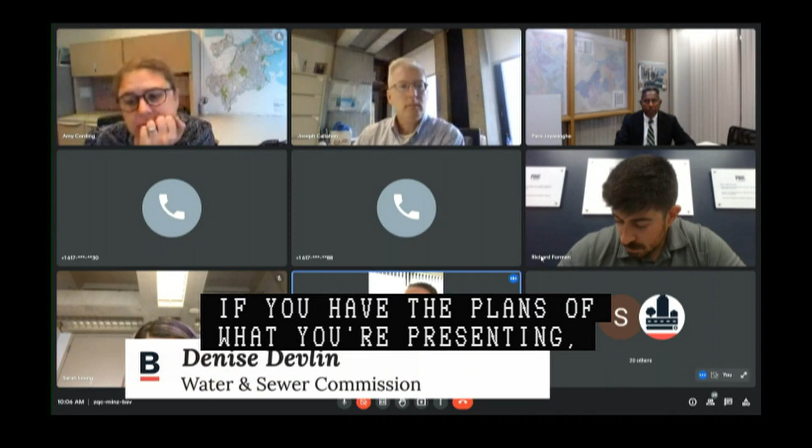Yeah, so far, these are just our comments. You appear to have included the hydrant. That was the only comment that we had. And also, I know Todd had already mentioned it about the stamp. Another comment was that it has to have a civil stamp on it. What you sent to us this morning is the same as what you sent to us before, so that's the same one you're presenting today. The location appears to be fine. We just had other comments with the hydrant, and it appears you made that change.

I don't know if it's appropriate, Para, to say it's contingent upon our approval, because the location was okay, but we still had comments that have to be addressed. And we still need to have the 4 copies to get stamped for approval on our end. Yes, regarding the stamp, I did confirm with our right-of-way manager that we do have a Mass civil engineering stamp that will be included going forward. I believe that was communicated in the email to Todd this morning with the revised plan. Oh, yes, it was.

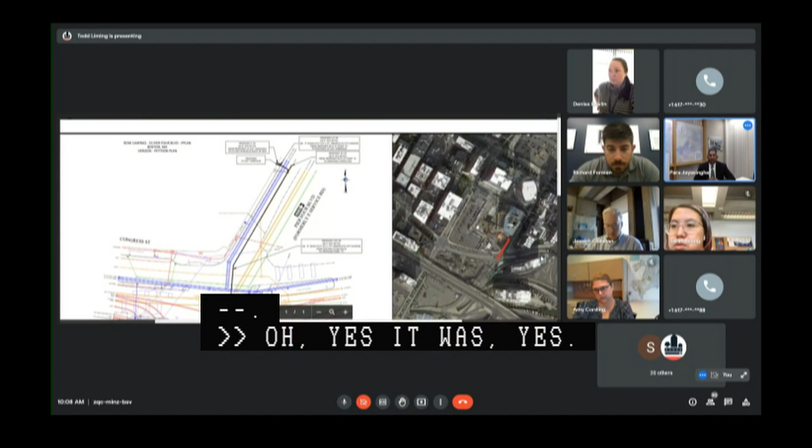Richard, I need to try and accomplish the sensible thing. So let me ask Ms. Devlin, may I suggest, hopefully it is agreeable to you, that we take a contingent vote here, so that we limit the exposure of Mr. Forman and his team from coming back again. We will take a contingent vote moderated by the board and superintendent, where the plans have to be revised to meet the totality of the needs as proposed by Devlin and staff. Is that comfortable with you, Mr. Forman? That seems to be the best thing I can do right now.

Para, I apologize. I actually can't really hear you that well. Oh, sorry. No, that's okay. I don't know if there's other noises in the background. Todd's the echo. Oh, sorry, everyone.

Okay, Todd, I think if you could mute the Boston Cable thing, it might be helpful. Denise, let me try this again.

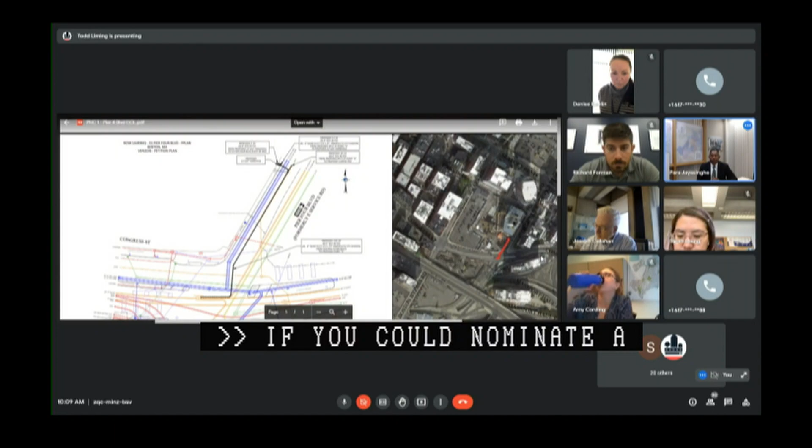So if you could nominate a motion where it is contingent upon the good people from the petitioner submitting the necessary revised plans, properly stamped, which negates the need for us to continue this hearing. Ms. Devlin, is that okay for you? Oh yes, that's fine. Thank you. Awesome. Mr. Forman, can you abide by those conditions?

Yes, so Ms. Devlin, if you don't mind me asking, are you saying that there were missed notes that were not included on the revised plan? No, there weren't. It appears that you made all the comments that we requested. But the appropriate process is to go through the Engineering Customer Services Department. So the location is okay for the conduit. It appears that you addressed our previous comments.

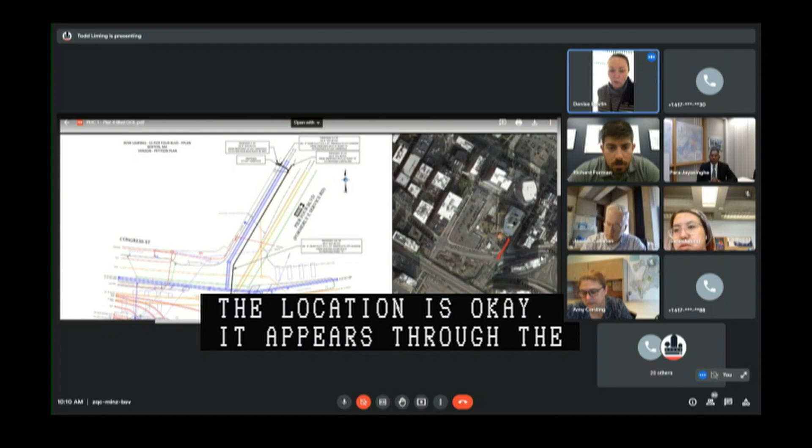Just with those other little nomenclatures, we just want to make sure that you file. Get the stamped copy through the Engineering Customer Services Department with the final set of approved plans from us. Okay, yes, so the stamped copy. Yes, so the contingency would be making sure that they are approved with the appropriate civil engineering stamp. Yes, and like our normal process, send Engineering Customer Services the 4 sets of copies to be stamped. Okay, agreed. Thank you.

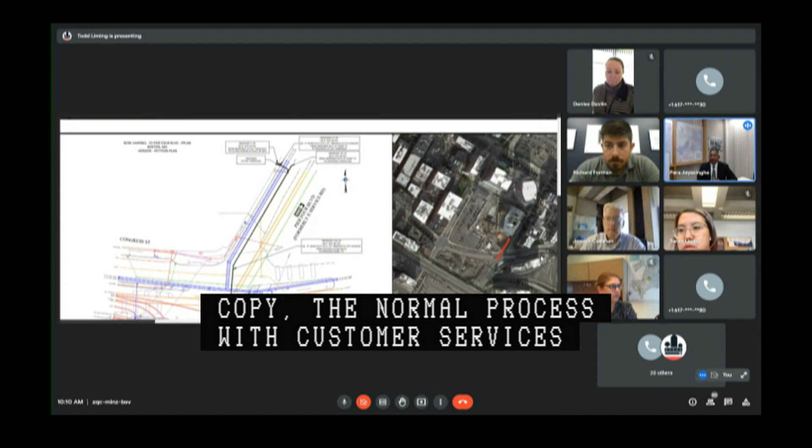Mr. Forman, sorry, Peter, just a tiny point of clarification because I was looking at some of the emails. So we need a person who is duly qualified to stamp the plans at the point of stamping. I don't want to put too much because I don't like to do group therapy in this format. Hopefully, Mr. Forman, you understand what is being requested. Yes, I understand. Awesome. So that all being said, any other commission member have any comments regarding the first public hearing continued item?

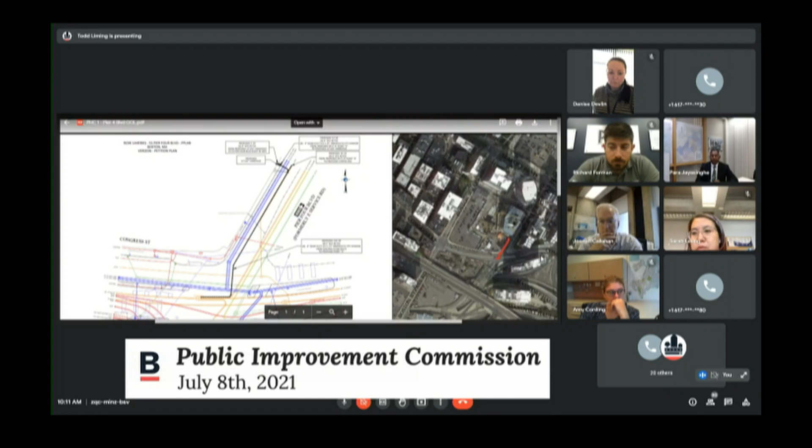Hearing none, PIC staff and all members of the audience? No, we are all set. And again, I apologize for the echo or the static from this microphone. It does need to remain open during the hearing for audiovisual purposes, but no comments on this project. Thank you, Todd. Ms. Devlin, I would like to get a motion from you at this point.

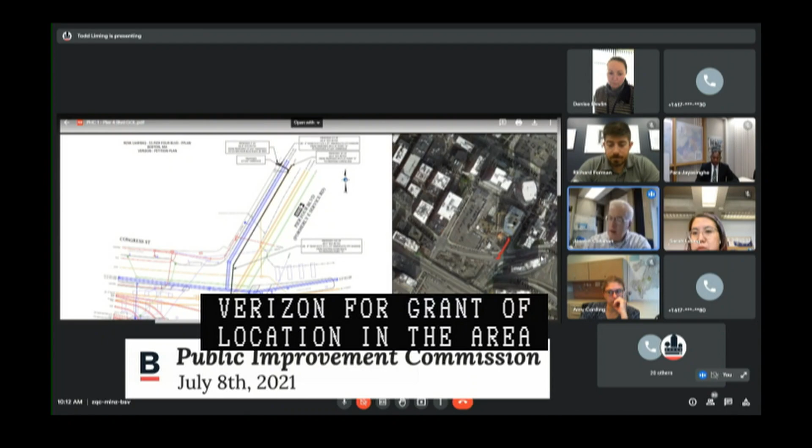I make a motion to approve a petition by Verizon New England for a grant of location in the area of Pier 4 Boulevard and Congress Street, contingent upon the applicant complying with Boston Water and Sewer requirements for plan submittal, and also contingent upon getting an authorized stamp from a civil engineer. Do I hear a second? Second. All in favor, please signify by saying aye. Aye. Aye. Anyone opposed or abstain? Hearing none, motion passes as a contingent vote. Thank you, Mr. Forman, Mr. Callahan and Ms. Devlin. Moving on to the public hearing segment of our agenda.

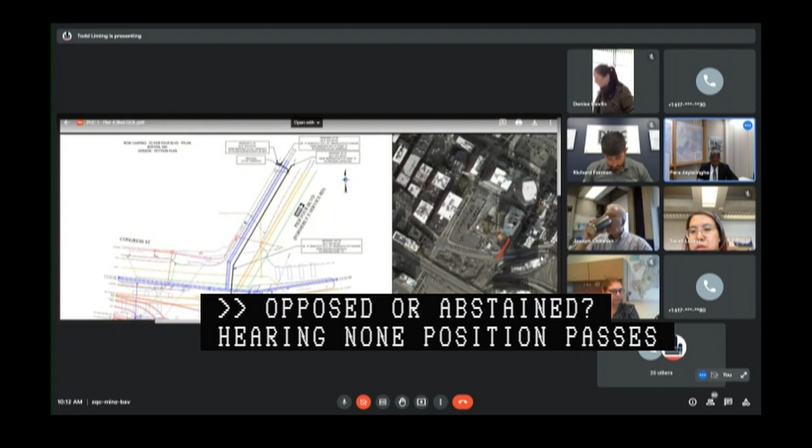Item number 1, on a petition by 250 Centre Street Housing Limited Liability Company for the discontinuance of any and all rights to travel the public may have had within a portion of Amory Street, a public way in Roxbury on its westerly side, south of Centre Street. This was brought under new business on June 24th of this year, as shown on a plan entitled City of Boston Public Works Department, Engineering Division Discontinuance, Amory Street, Roxbury, one sheet dated June 14, 2021.

Good morning, Commissioners. This is David Aiken, Senior Project Manager at the Community Builders. I'm joined here today by John Schmid from Nitsch Engineering. This is a discontinuance request so that we can construct 250 Centre Street, which is 110 units of mixed income housing, about 2/3 of which are affordable and income restricted housing. We are getting ready to commence construction later this month.

And in the time since the new business hearing, we have taken fee ownership of the underlying property, which was one of the items that we had to do to meet the public hearing requirement here today. And we've also submitted the appraisal to the Public Improvement Commission staff, which I know is under review. So we're hoping for a vote on this today so that we can continue to move forward and start construction on this development later this month. John Schmid has the plans that he can share if needed.

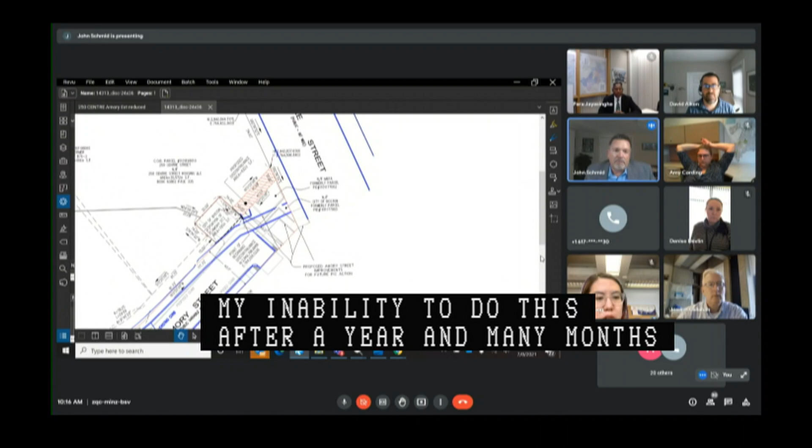So first of all, I apologize for my inability to do this after a year and many months of Google Meets. So we're proposing to discontinue 432 square feet of the layout of Amory Street Extension. And this will allow the construction of 250 Centre Street to commence, which is an affordable housing project in the Jackson Square neighborhood. This discontinuance will still allow the city a 40-foot right-of-way that will bring Amory Street Extension to Centre Street, should there be desire to make a connection by roadway to Centre Street in the future.

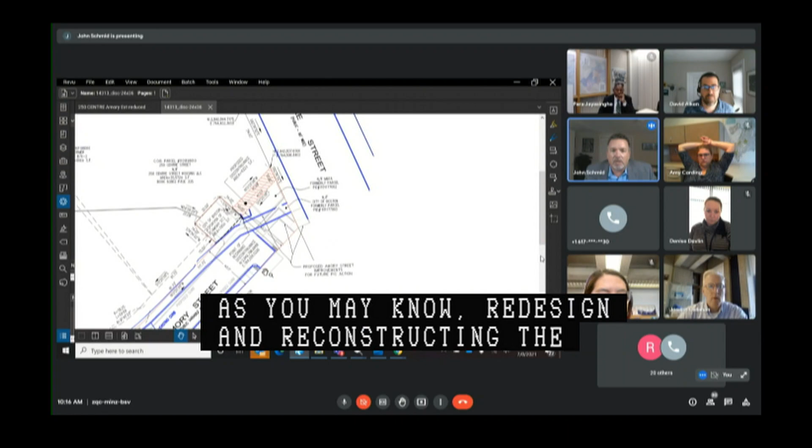As you may know, we are in the process of working with Boston Public Works in redesigning and reconstructing Amory Street Extension, which will allow a pedestrian pathway from the end of the extension through the remaining 40 feet of public right-of-way space to Centre Street. And actually, this morning we received an email from Zach with the first 25% review comments. And we will be coming to the commission probably sometime this fall for the Amory Street Extension approvals. But for today, we're asking for the discontinuance of 432 square feet that is approximately 10 feet wide and 45 feet long.

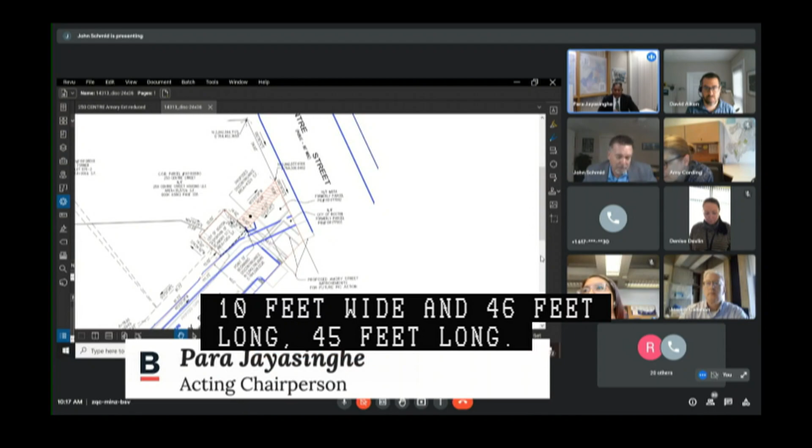John, just to echo some of the thoughts you have shared so far, I want to hear again that the discontinuance does not impede in any way, either through design or through construction, the city's ability to do the extension work. Right. So this design does not impede any existing utilities or proposed utilities or the city's ability to proceed with the extension work.

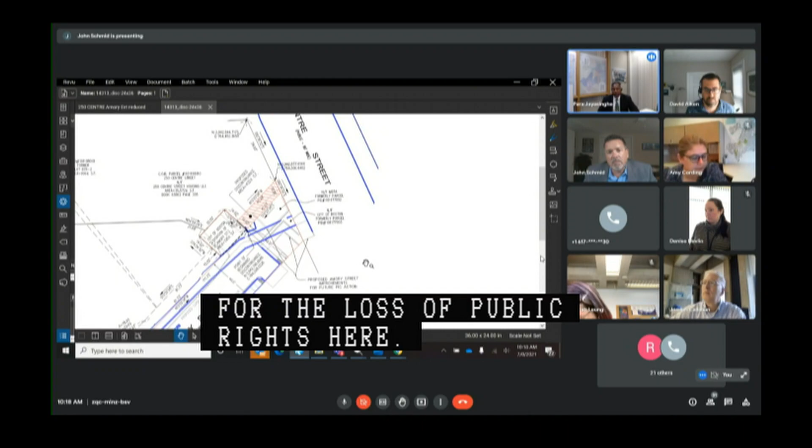Wonderful. Second question, and this is for Mr. Liming of PIC staff. Todd, who is the fee owner in the discontinuance? Is there monies involved with it? Yes, the petitioner is the sole owner of the fee interest in this land. They have submitted an appraisal to us. We are reviewing it, and provided that there are no issues with the appraisal, the petitioner will pay the city for the loss of public rights here. So I want to make sure that this doesn't get recorded until we finalize those conversations, Todd. I believe that is the normal way which we do business. Correct. We will not record any discontinuance documents until the city approves the appraisal that was submitted. Wonderful. Thank you, Mr. Liming, for that clarification.

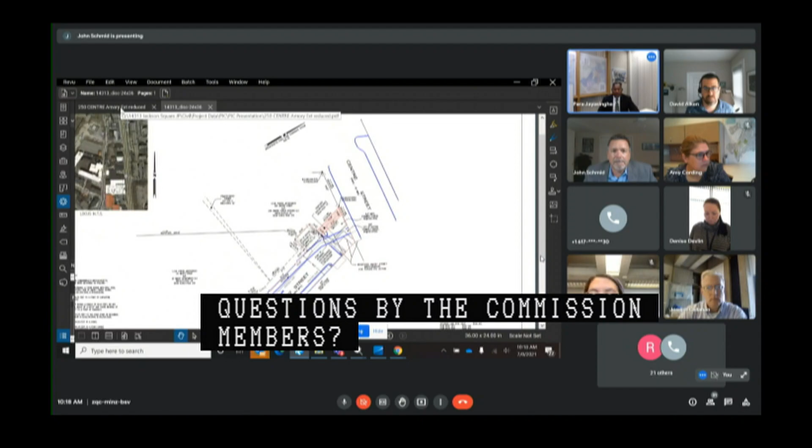At this point, are there any questions by fellow commission members? Hearing none. Are there any comments by PIC staff and or members of today's audience? No, none. At this point, I'd like to hear a motion regarding public hearing number 1. I'll make a motion to approve a petition by 250 Centre Street Housing LLC for the discontinuance in Amory Street as read into the record by the chair. Second. All in favor? Aye. Anyone opposed or abstaining? Hearing none, motion passes. Thank you, folks. Thank you very much.

Moving on to the second item on the public hearing segment, on a joint petition by Corey Realty Ventures Nominee Trust and Jordan Realty Advisors LLC for the acceptance of a pedestrian easement adjacent to the following public ways in Brighton. Corey Road on its southeasterly side at address number 249 southwest of Jordan Road. Jordan Road on its southwesterly side between Corey Road and the town of Brookline municipal boundary. This was brought under new business on June 24th of 2021, as shown on a plan entitled City of Boston Public Works Department Engineering Division Pedestrian Easement Plan 249 Corey Road, Jordan Road, Boston, Brighton, one sheet dated June 17th, 2021.

Good evening, everyone. My name is Bert Corey. I'm with DGT Associates, civil engineers and surveyors for this property. As you mentioned, I'm representing Jordan Realty Advisors, LLC, and Corey Realty Ventures Nominee Trust. Even though my last name is Corey, I have no relation to Corey Road nor to Corey Realty Ventures Trust. I just happen to have the right name, I think, for this project. So this particular one is actually, let me present my screen. Thank you, Bert. You're good. You're welcome.

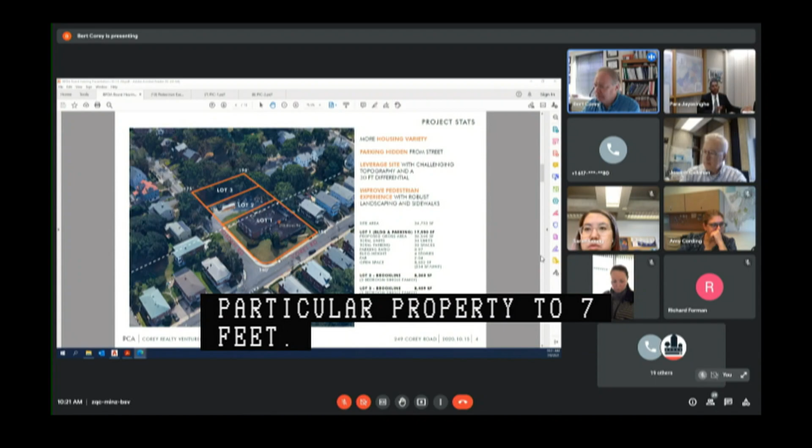249 Corey Road is at the corner of Jordan Road and Corey Road in the Brighton district. It is owned by the applicant, and for this particular public hearing, this is with regards to the pedestrian easement plan. So as part of the process and the information that we received back from the city agencies, there was a request to widen the sidewalk along this particular property to 7 feet. And in order to do that, the pedestrian easement was drawn up to allow approximately a half a foot onto the subject property, so that the sidewalk from the curb to the retaining wall that will surround this front part of the property would provide that 7 feet. The pedestrian easement plan is shown. It's also dated 6/17. It was presented during the new business.

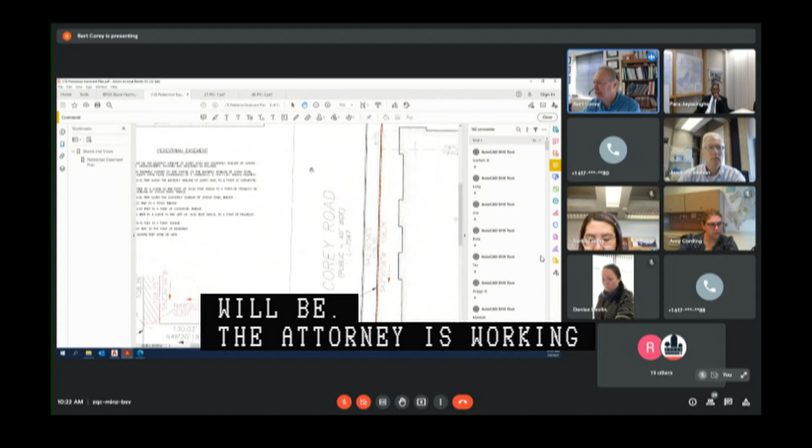I think as far as, like I said, it's a half a foot in from the property line, and we show the detail of what that pedestrian easement will be. The attorney is working on the verbiage for that, or the written easement, as well as the grant of easement for that. Thank you, Bert.

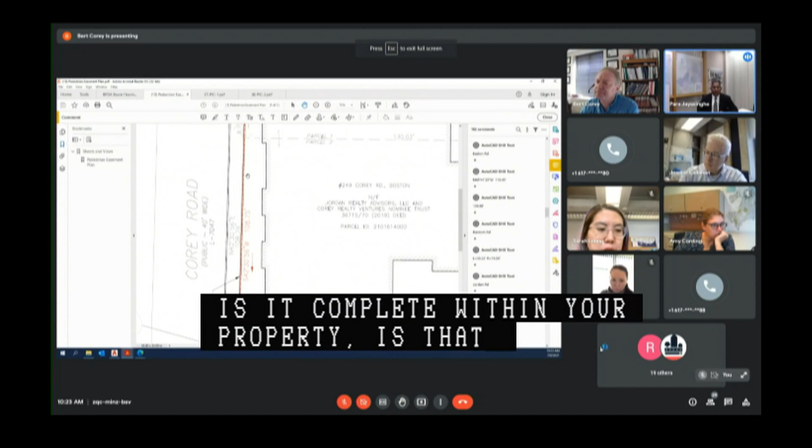Just a point of clarification triggered by a comment you made. You said that there's a retaining wall associated with this project. I'm going to assume two things. One, it is completely within your private property. Is that correct, Mr. Corey? That's correct. Second, Mr. Bert, I'm going to assume also that the said retaining wall shows up either in the specific repair plans or the pedestrian easement plans, because I can't quite see. Can you verify whether the retaining wall shows up in one of the two plans?

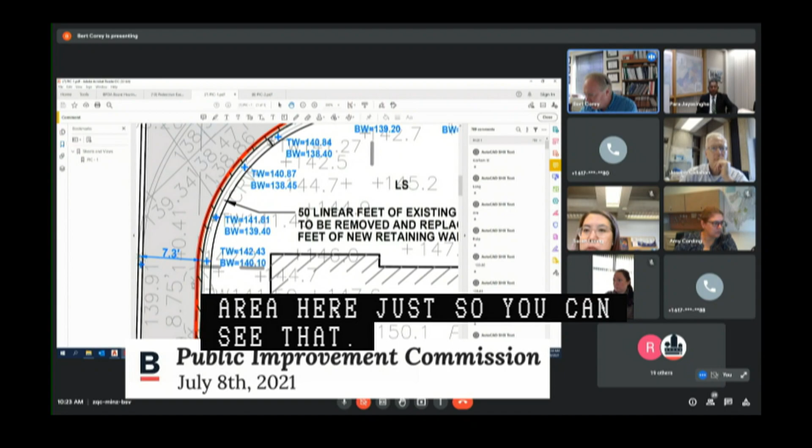Yeah, if we go into the plan that was prepared, it's part of the specific repair. Yeah, it's the specific repairs. All right, let me zoom in on an area here, just so you can see that. Okay, if you can see this, this area here is the retaining wall. So the front face of the retaining wall will be right on the edge of the easement. Thank you, Bert. Appreciate you clarifying.

If you could put back the pedestrian easement plans, because that is the subject of the present hearing. Yes. Even though I took you on a left turn, I just want to make sure that there's continuity in the conversation. So, appreciate you taking the extra efforts to provide this easement. At this point, I'll open up for any questions or comments by fellow commission members.

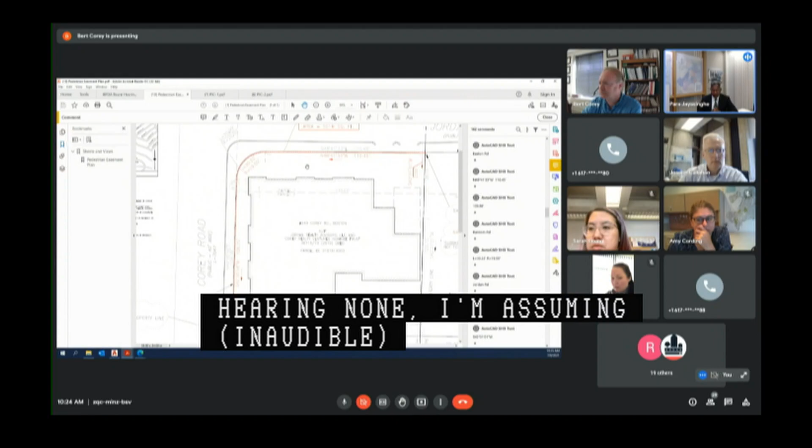Hearing none, I'm assuming that we are all very appreciative of you taking the extra step to provide that half a foot to ensure that our sidewalks are as usable as possible on a 40-foot layout. Are there any comments or questions by PIC staff and or members of today's audience? No, none. At this point, I'd like to hear a motion regarding public hearing number 2.

I'll make a motion to approve a joint petition by Corey Realty Ventures Nominee Trust and Jordan Realty Advisors LLC for pedestrian easement in Corey Road and Jordan Road as read to the record by the chair. Second. All in favor, please signify by saying aye. Aye. Aye. Anyone opposed or abstain? Hearing none, motion passes.

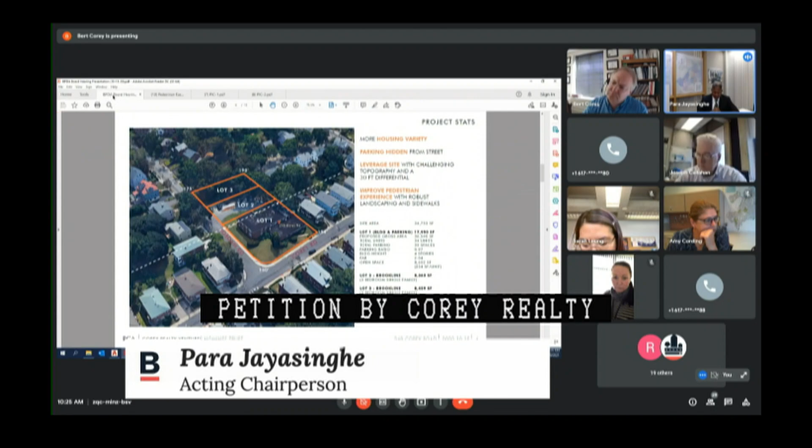Third item on today's agenda, on a joint petition by Corey Realty Ventures Nominee Trust and Jordan Realty Advisors LLC for the making of specific repairs within the following public ways in Brighton, consisting of curb realignment, sidewalk reconstruction, as well as new and relocated pedestrian ramps, storm drain infrastructure, and driveway curb cuts. Corey Road on its southeasterly side at address number 249, southwest of Jordan Road. Jordan Road on its southwesterly side between Corey Road and the town of Brookline municipal boundary.

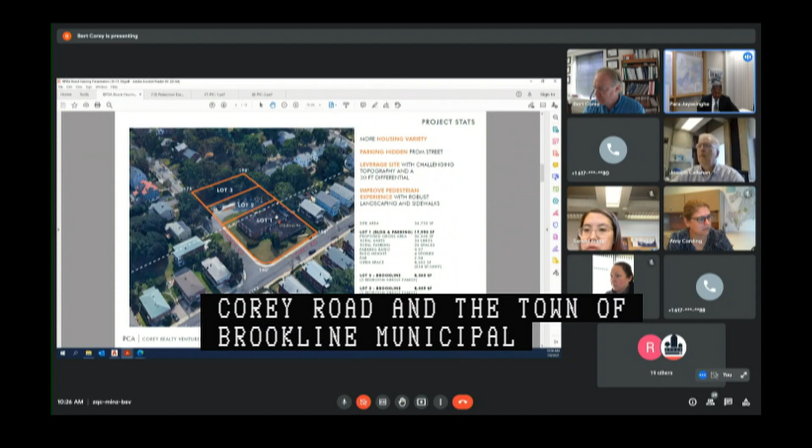This was brought out as new business on June 24th of this year, as shown on a set of plans entitled City of Boston Public Works Department, Engineering Division Specific Repair Plan 249 Corey Road, Jordan Road, Brighton, dated June 17, 2021.

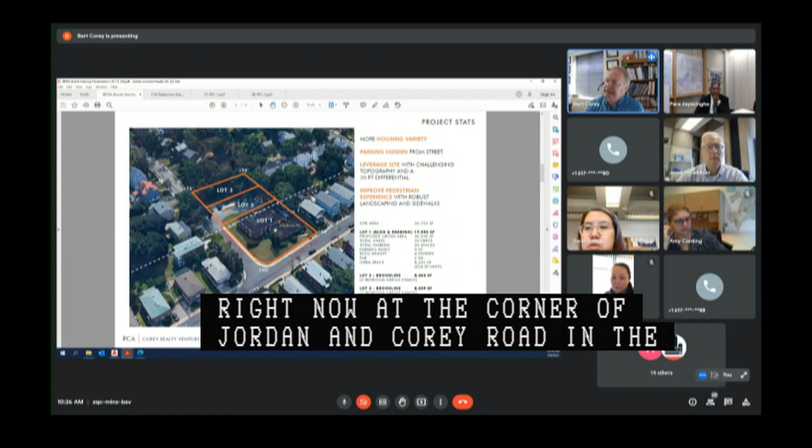Again, Bert Corey, DGT Associates, we're the surveyors and civil engineers for this project, representing Jordan Realty Advisors LLC and Corey Realty Ventures Nominee Trust. 249 Corey Road is shown on the screen right now. It's at the corner of Jordan Road and Corey Road in the Brighton district. The project involves demolition of the existing 2-story building. It's vacant. It used to be the Corey Hill Nursing Home. Let me go back one here. This gives you a view of the existing site, Jordan Road, and then also Corey Road.

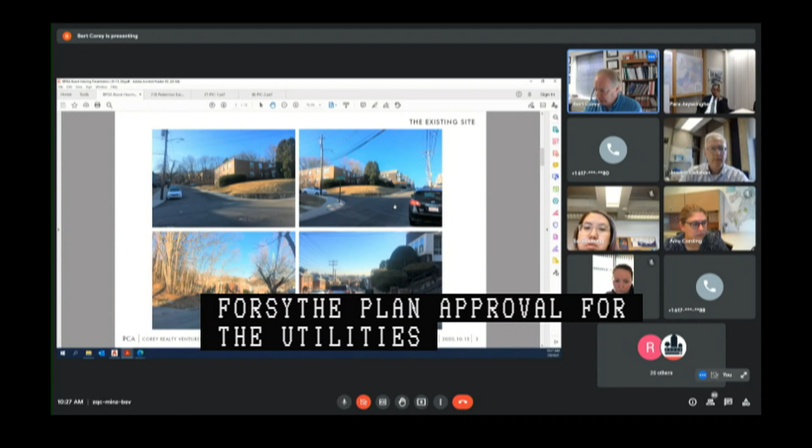As part of this process, we sent out the notifications to the city agencies as well as the utility companies. We did receive back some comments from the Public Improvement Commission, the Boston Planning and Development Agency, and the Disabilities Commission, as well as from Boston Water and Sewer. Combining all of those comments together, we're able to address all of them on the plans that you have in front of you. And just to go through those, it involves about 250 linear feet of sidewalk area that is to be replaced, starting from Jordan Road, heading down Jordan Road, around the corner, and then up Corey Road.

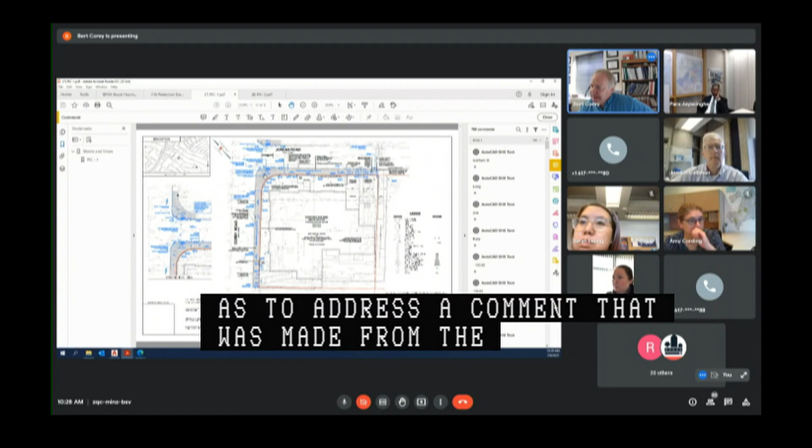As to address a comment that was made from the BPDA about tightening up the existing curb radius here from 26 to 10 feet, we were able to gain a little extra area, so that was very helpful to address a comment made by the Disabilities Commission in trying to move the pedestrian ramp from an apex configuration to one that is a little bit further up gradient of Jordan Road. And again, this change in curb radius here allows for that to occur.

At the same time, Boston Water and Sewer had a comment with regards to the existing catch basin that was at this corner. Right now, it somewhat interferes with the pedestrian ramp in that it's in a transition curve, and because of that, it really can't be a gutter mouth. Well, as part of all of these comments, we're able to move that catch basin up Jordan Road just slightly so that we could install a gutter mouth catch basin.

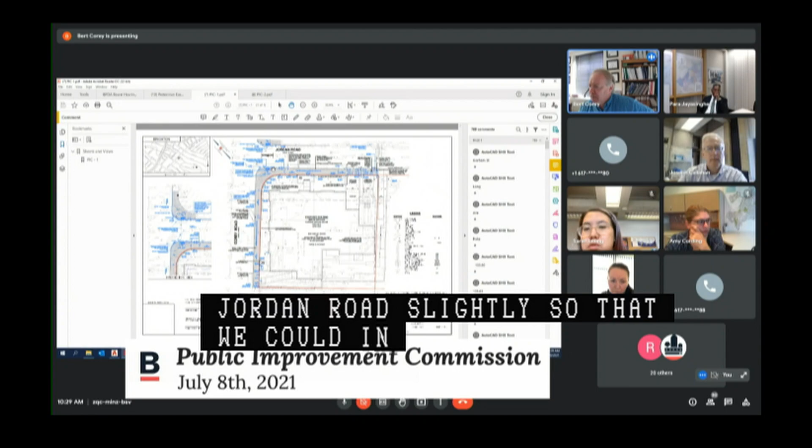So between all of those, everything worked out terrific. The extra width on the sidewalks helped out. So I think we had all good comments, and they are all addressed in this particular plan. I think I covered most of it. There are two entrances to this facility. One is a main entrance, which goes down into a lower level parking garage. That is 12 feet wide, and there's also another 12-foot wide curb cut that provides at-grade parking for FedEx, UPS, deliveries, trash removal, that type of stuff.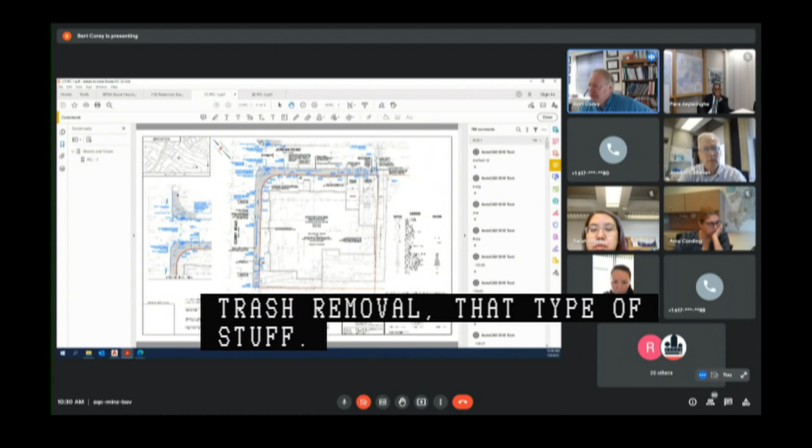Also, on the reciprocal ramp for this particular one, we're rebuilding that to a point where we can get the access ramp as well as the level landing pad to meet the specifications. However, because of the grades on this road, approximately 10% on Jordan Road coming downhill and Corey Road running downhill, with the 10 and the 10 running away from each other, the transition ramps become a little steeper than what we would typically provide to meet the handicap accessibility regulations. So we will have to go for a variance for the transition ramps, but we can provide a level landing area. So it's definitely an improvement to that reciprocal ramp. Any questions?

Oh, good morning, Bert. How are you?

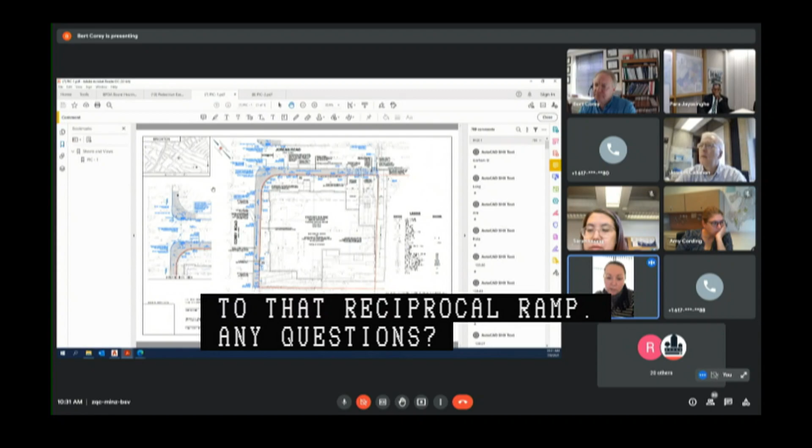Hi. Thank you for making that change that we requested for moving the catch basin so you can fit the gutter mouth. We did have an additional comment. On the specific repairs plan, that catch basin on Jordan Road, you show it tied into a manhole on Corey Road, and that is actually a change in grade. It's not a manhole. So the request we're making is that for that tie-in for that catch basin, we want it to go perpendicular to the drain on Jordan Road. And I can send you the comments after the meeting today, scan them in and email them to you.

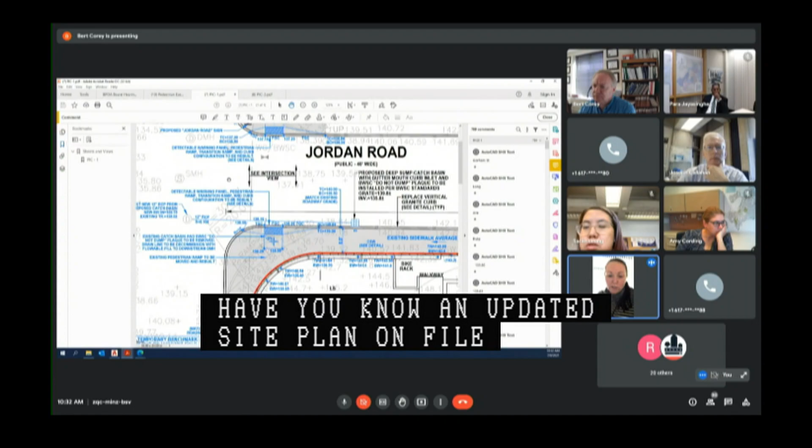Okay. And then, because it did change, we do want to have an updated site plan on file. So if you could just please contact Lewis from our Engineering Customer Services Department to make those changes. Sure. Thank you.

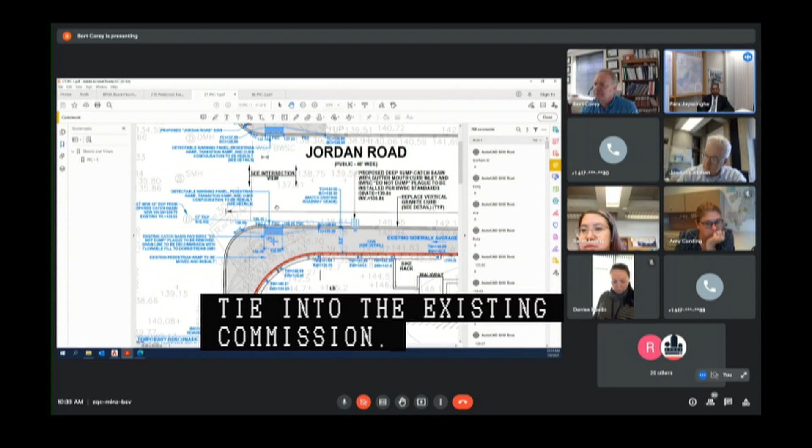Any further comments by fellow commission members? Sarah, I'm going to assume you're all okay with the condition of the ramps and the variances that Bert spoke of. Yes, and we appreciate the project team's openness to our feedback, and we're working with the project team as well for that variance that's needed to tie into the existing conditions. Thank you. Any further thoughts or comments by fellow commission members? Hearing none. Comments by PIC staff and or members of today's audience? None.

Excellent. At this point, I'd like to hear a motion regarding public hearing number 3. I'll make a motion to approve a joint petition by Corey Realty Ventures Nominee Trust and Jordan Realty Advisors LLC for the making of specific repairs in Corey Road and Jordan Road as read into the record by the chair. Second. All in favor, please signify by saying aye. Aye. Aye. Anyone opposed or abstained? Hearing none, motion passes.

Thank you, Bert. Nicely done. Thank you very much. Have a great day. You too.

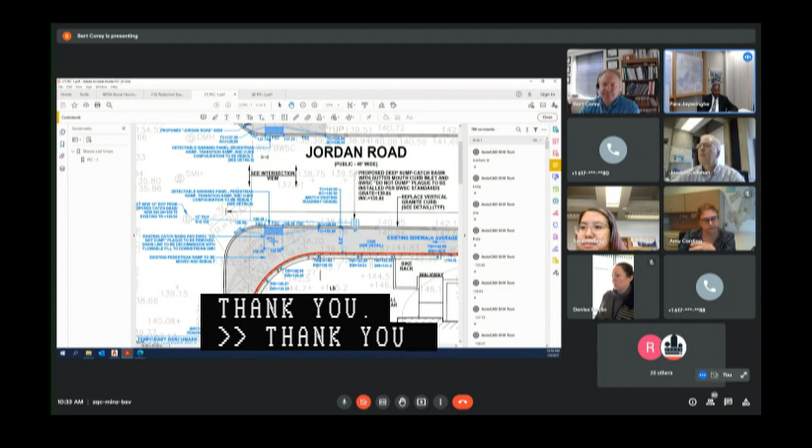Next item, public hearing number 4 on a petition by Bartlett Place Land Inc. for the making of specific repairs within the intersection of Washington Street, Bartlett Station Drive, and St.

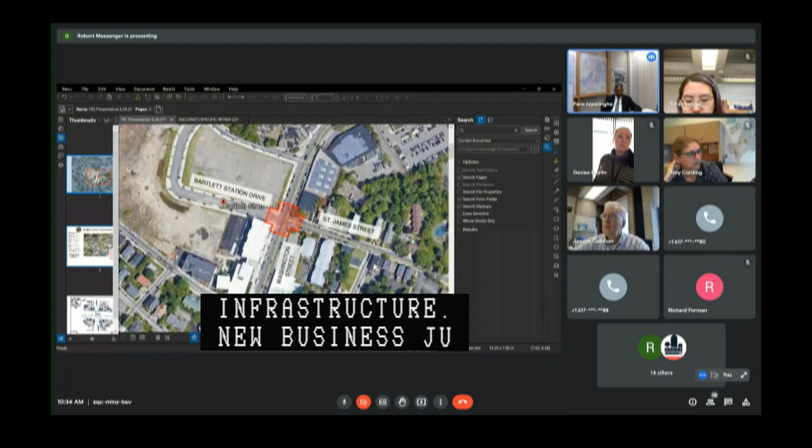James Street in Roxbury, consisting of curb realignment, sidewalk reconstruction, as well as new and relocated pedestrian ramps, traffic signal infrastructure, and street lighting infrastructure. This was brought under new business on June 24, 2021, as shown on a plan entitled City of Boston Public Works Department Engineering Division, Specific Repair Plan, Washington Street, Bartlett Station Drive, and St. James Street, Roxbury, one sheet, dated March 2nd, 2021.

Good morning. Good morning, members of the commission. Ian McKinnon here from Howard Stein Hudson, here on behalf of Bartlett Place Land Incorporated and Nuestra Comunidad, the team leading the Bartlett Station redevelopment. This morning, I'm joined by Andre Jones from Nuestra and Bob Messenger, also from Howard Stein Hudson.

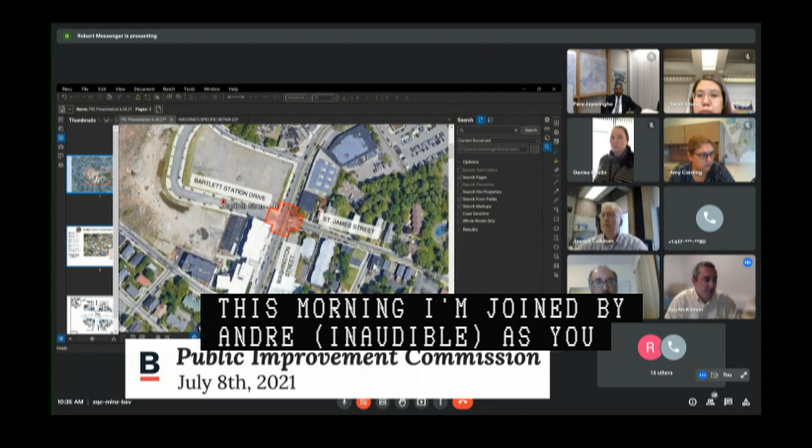As you may recall, 2 weeks ago during new business, we introduced this petition connected to the Bartlett Station mixed-use redevelopment on the former Bartlett Yard MBTA maintenance facility site just south of Nubian Square. Based on feedback from 2 weeks ago, we've made some minor plan updates, and my colleague Bob Messenger here from our team is here to walk you through the plan.

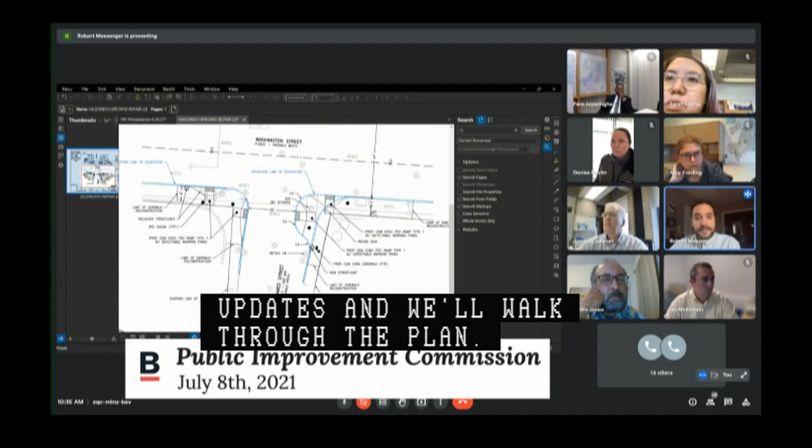Thank you, Ian. Just to orientate everybody, we've got Washington Street in the middle of the plan, Bartlett Station Drive to the top, and St. James Street on the bottom. For both intersections, the specific repairs are curb realignment, new sidewalk, and new pedestrian ramps. Zooming in on St. James Street first, that's where the majority of the new sidewalk will be. We're providing a new bump out here, city standard 10-foot curb radii. This shortens the crossing to about 26 feet for a bit safer route for the pedestrians. Just to note, St. James Street is a one-way.

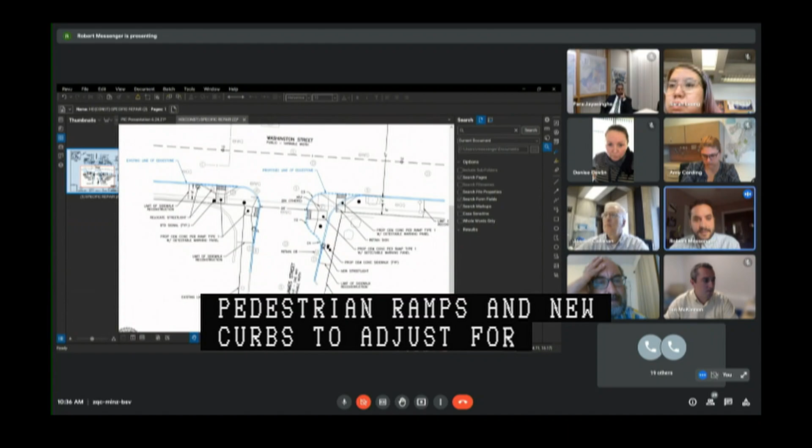On the other side of the intersection, the new pedestrian ramps and new curbs to adjust for that, and everything else is staying in place. In addition to this, the project is providing new BTD signals for the intersection. We do have enough separation for accessibility, and street lighting has commented as well, and we're relocating a street light, and we're also providing a new street light here. And in the area of the new sidewalk, there is an existing electrical duct bank that's owned by Eversource, and in the construction documents, we are providing an adjustment to grade for that manhole. However, they had no response to our reach out and our coordination.

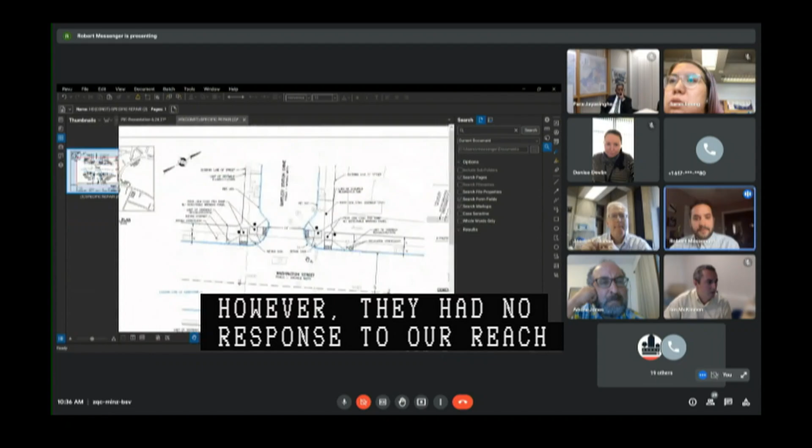Moving on to Bartlett Station Drive, very similar curb realignment. The existing opening here is 24 feet. It's maintaining the existing opening. We're straightening out or providing the 10-foot city standard radius here. Everything else is the same. New pedestrian ramps, new sidewalk. We're removing the existing apex ramps and we're straightening that out to shorten the crossing for pedestrians. And of course, new BTD signals outside of the landings, and relocated streetlight and retaining streetlight as well. And that is all.

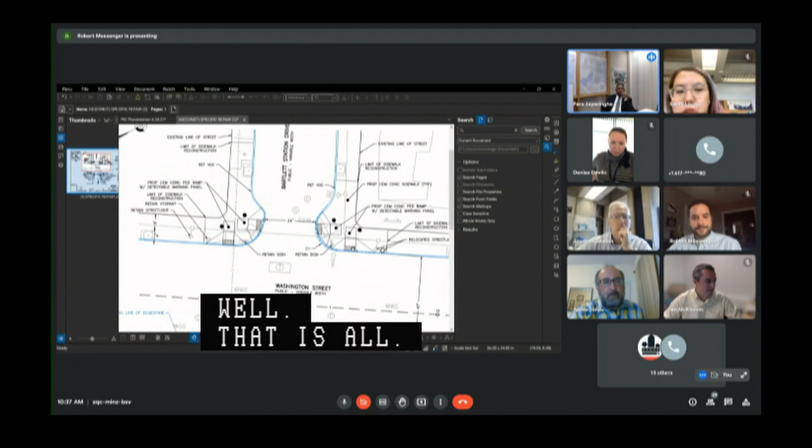Thank you, Robert. Any questions by fellow commission members regarding this presentation? Amy, I'm going to assume you're okay with the timetable and the installation of this new traffic signal, including the approval processes and all of that good stuff? Yeah, I think that Ian's gone through Don and those guys. Okay. Ian, do you have a sense of when the traffic signal might get installed? Is it a mast mount or a pole mount?

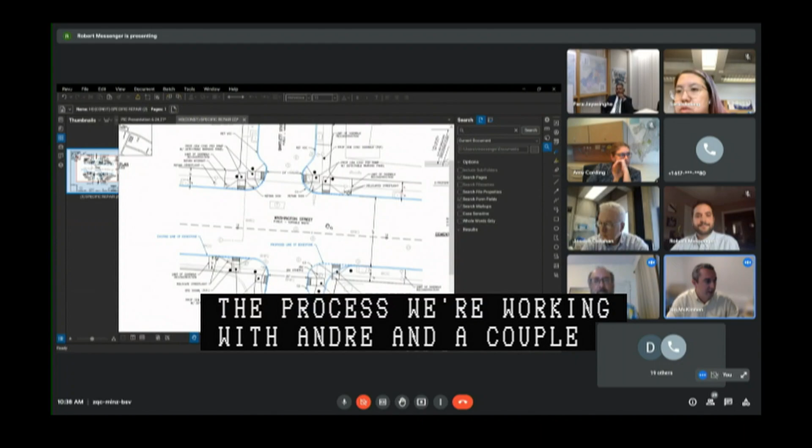Yes, we're moving into procurement this fall as part of the MassWorks grant process that we're working with Andre and a couple other parts of this infrastructure as part of this development. So later this fall is when we're going to kick that off. So we wouldn't expect this before next spring to be installed. And it has been coordinated through Don. It will be interconnected and everything is up to snuff with him.

Okay, so what we need here is a set of plans that shows the traffic signal infrastructure and the new lane markings, because you are squeezing the intersection, and it will be good for us to know where the new lane markings are, including any center line, gutter line, and all of that good stuff. You sort of understand what I'm saying, right, Ian? 100%. Yep. Awesome. Perfect. How about that?

Sorry, I lost my train of thought. Any further comments or points by fellow commission members? Hearing none. Comments by PIC staff and or members of the audience today?

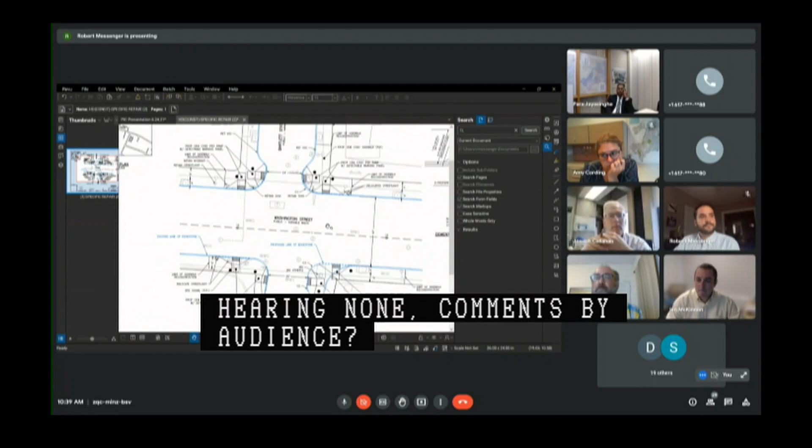Todd, are you okay with things? Sorry, no, no issues with this and no public testimony either. Okay.

Ian, again, it's sort of important for us to get those traffic signal plans, because I'm sure the city would be quite interested to know whether it's a semi-actuated or a fully actuated system, whether this is coordinated with the next traffic signal, and how all of that stuff is going to get done, by when, or something of that nature. Okay, at this point, I'd like to get a motion regarding public hearing number 4.

I'll make a motion to approve a petition by Bartlett Place Land, Inc. for the making of specific repairs within Washington Street, Bartlett Station Drive, and St. James Street, as read in the record by the chair. Second. All in favor? Aye. Anyone opposed or abstain? Hearing none, motion passes. Next item. Thank you. Thank you. Thank you.

Fifth item on today's agenda, on a petition by Massachusetts Port Authority for a grant of location to install new utility infrastructure within Lovell Street, a public way, East Boston, located at the site of 41 Neptune Road, generally southwest of Neptune Road. This was brought on a new business on June 24th of 2021, as shown on a plan entitled City of Boston Public Works Department Engineering Division Grant of Location Plan 41 Neptune Road, Lovell Street, East Boston, 1 sheet dated May 2021.

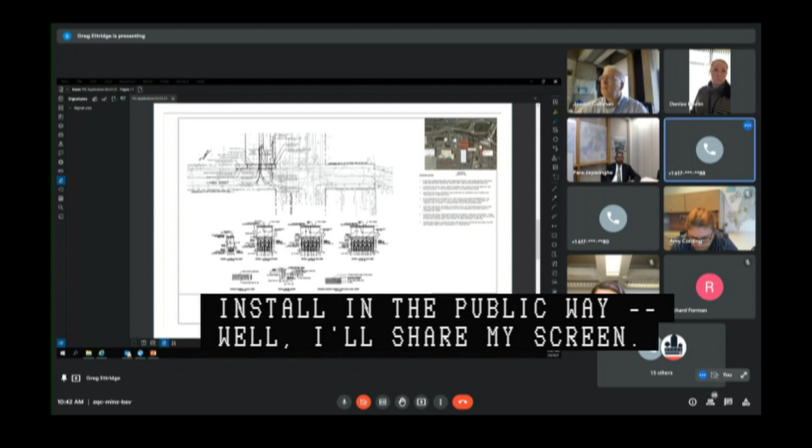Thank you. Massport is looking for a petition for a grant of location to install some utility duct banks in Lovell Street, which is a public way, and I'll share my screen. I'll zoom in here. So you can see here in the plan, this is Lovell Street, this is Neptune Road. What we're looking to do is to install duct banks from the existing Massport manhole K19 for a new manhole that we'll be installing on Massport property into the Massport customer station, ST 266.

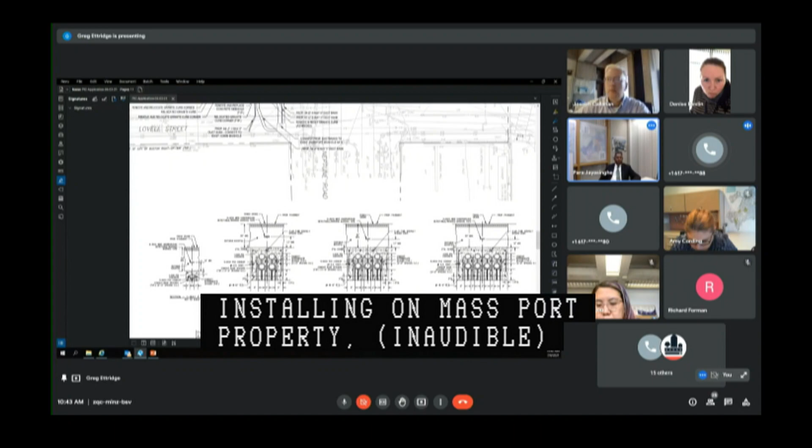So we're looking to install a 3-inch telecommunication duct bank, a 4-way 5-inch duct bank, 6-way 5-inch duct bank, and an 8-way 5-inch duct bank, connecting the Massport pond manhole, and connecting manhole 1819 to a new manhole that will be installed on Massport property.

Also, as part of this, we will be relocating an existing, and I can move to that plan. There is an existing curb cut that we're also requesting relocation and reconfiguration of the sidewalk with new curb cut to allow for utility vehicles and maintenance vehicles to access the site. This location you can see of the curb cut. It doesn't really go to anywhere, and we're looking to locate that down where we'll install a gate in the fence so that we can provide access to maintenance vehicles, periodic access.

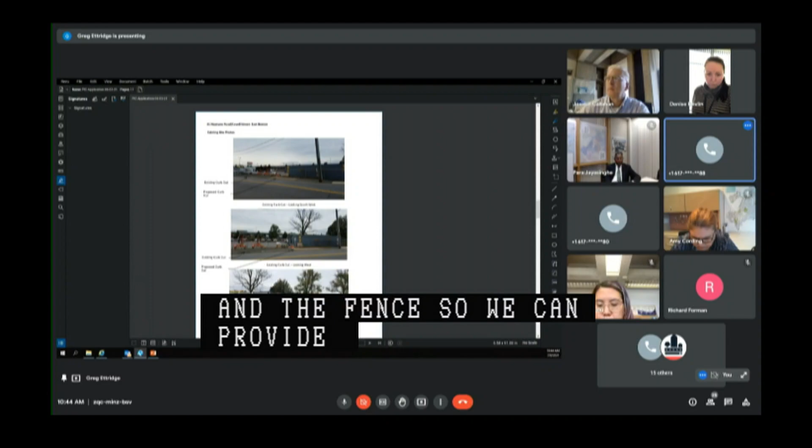Greg, just a point of clarification, and I stand to be corrected by my PIC staff. Your petition is just for the grant of location for the telecommunication conduits and not, I repeat, not for the relocation of the curb cut. Mr. Liming, could you confirm that for me, please? That's correct. The project has submitted a curb cut application, and that is currently being reviewed administratively by Public Works and Transportation Department. So the curb cut is not the subject of this action. Thank you, Mr. Liming. Appreciate clarifying that based on Greg's comments.

Greg, just a background, your conduits, is it mostly telecommunication conduits or is it both telecommunications and power? Correct. It's for both communication conduit and for medium voltage power. Thank you, Greg. At this point, are there any comments or questions by fellow commission members?

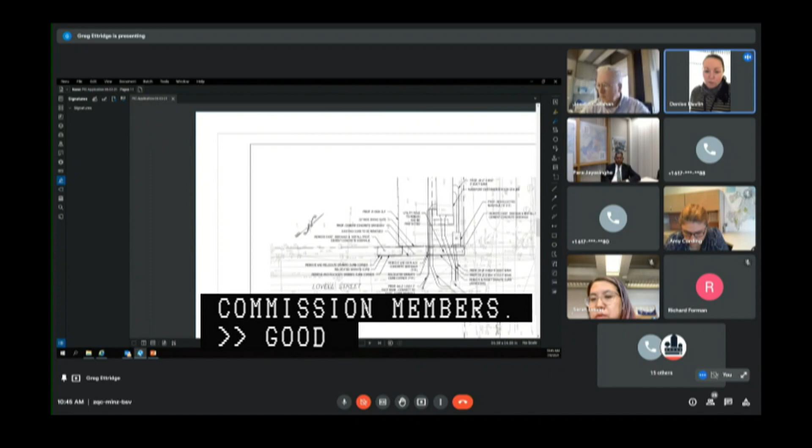Oh, good morning, Greg. This is Denise Devlin from Boston Water and Sewer. We didn't have comments on the plans, but we do need to have these plans filed with our Engineering Customer Services Department, so they will be contacting you after the meeting. I actually don't have your contact information. I can contact the person who sent out the plans if that's okay with you. I can just put your name in the email that you presented the plans. Sure. Okay. That's perfect. Thank you.

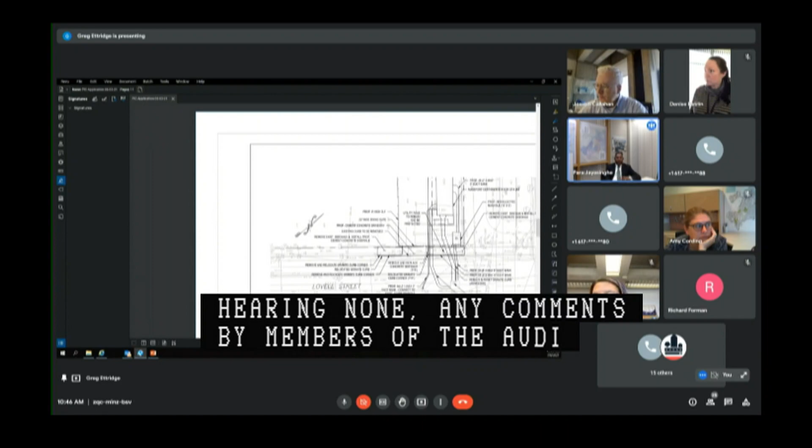Any further comments by commission staff? Hearing none, any comments by PIC staff and or members of today's audience? No, none. Thank you. At this point, I'd like to get a motion regarding public hearing number 5.

I'll make a motion to approve a petition by Massachusetts Port Authority for a grant of location in Lovell Street as read into the record by the chair. Second. All in favor, please signify by saying aye. Aye. Aye. Anyone opposed or abstained? Hearing none, motion passes. Thank you, Greg. Thank you.

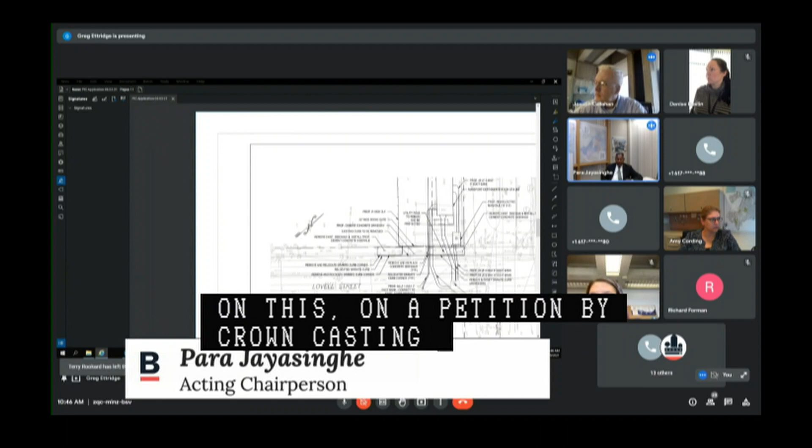Final item on today's agenda, item number 6, on a petition by Crown Castle for a grant of location with lead company status and no participants to install new telecommunication conduit with city shadow within the following public ways in South Boston: Summer Street, generally between address number 415 and D Street; D Street, D for David, generally at Summer Street. This was brought under new business on June 24, 2021, as shown on a plan entitled City of Boston Public Works Department, Engineering Division, grant of location, Crown Castle, Fiber, Boston, Summer Street, D Street, one sheet dated June 2021.

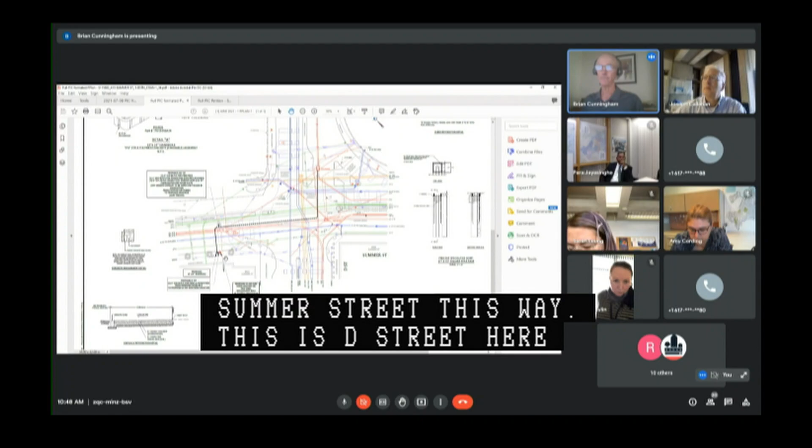Okay, thanks, Todd. As Para mentioned, we're petitioning for a grant of location for telecommunications conduit on Summer Street and D Street. To orient you, this is Summer Street this way. This is D Street here. The total length of the proposed conduit is about 245 feet from a light pole right here outside of 425 Summer Street to a handhole to be placed in the sidewalk, into Summer Street, over to D Street, and up to electric manhole 26686, from which point we would lease Eversource conduit about 330 feet down D Street this way to connect to our fiber backbone.

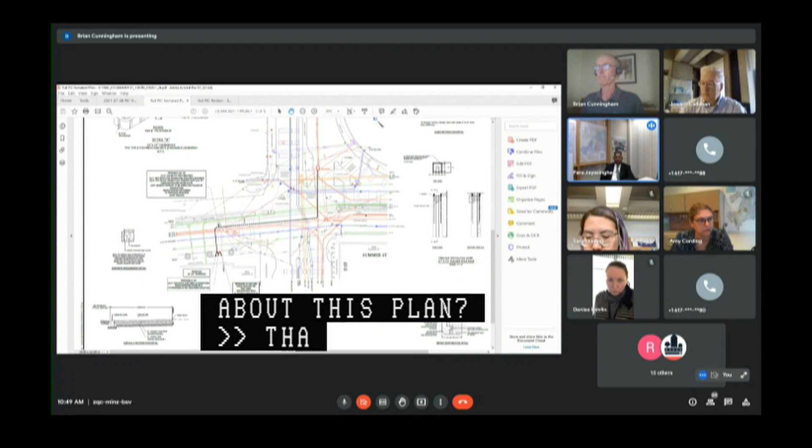We plan to install two 2-inch conduits, one for power, one for fiber, plus a 4-inch city shadow conduit with 4 interducts inside of the city shadow. This was presented in the new business hearing on June 24th. We have not received any interest from other potential participants since that meeting. Any questions or comments about this plan? Thank you, Brian. Questions or comments by commission members? Questions or comments by PIC staff and or members of today's audience?

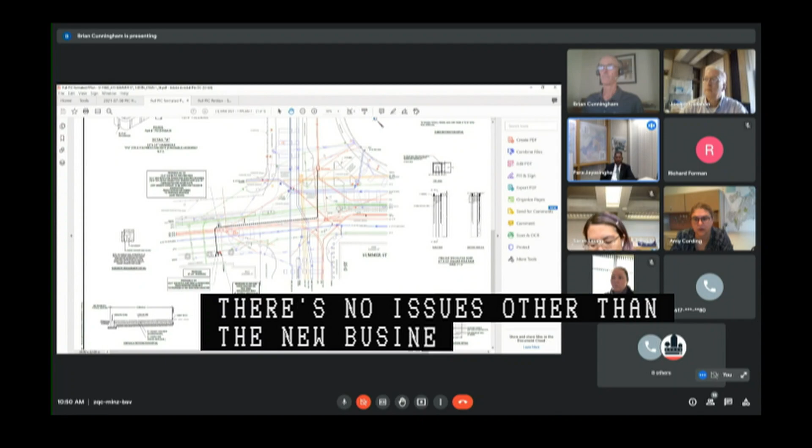Just a note that the new business agenda for this project incorrectly listed the location as 415 D Street. It is in fact 415 Summer Street. Thank you, Todd, for that point of clarification. I'm going to assume, Todd, that the plans being shown, at least the title block, has it correctly identified? Yes, the plans are correct. The newspaper advertisements were correct. There's no issues other than the new business agenda. Thank you, Mr. Limey. I think these are brick crosswalks. Are you restoring them?

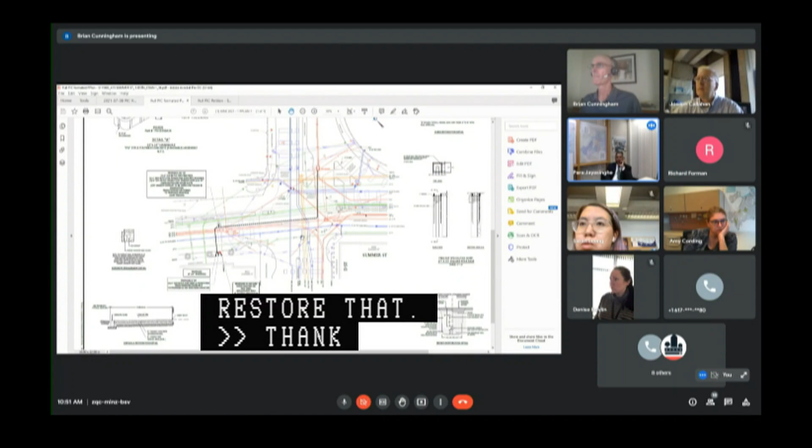I believe it's concrete sidewalk, actually. Well, the sidewalk, and then I think across it is either stamped concrete or some sort of paver that goes across the end of D Street. I'm sorry, can you indicate where, over here? Yeah, through that median island. Okay, through here? Yeah, I think that that's a specialty crosswalk. If it is, we will certainly restore that. Thank you, Brian. As always, we expect you to adhere to what is in the best interest of the city, its clients, and its citizens. So truly appreciate you being attentive to the little details. Absolutely. Thank you, Para.

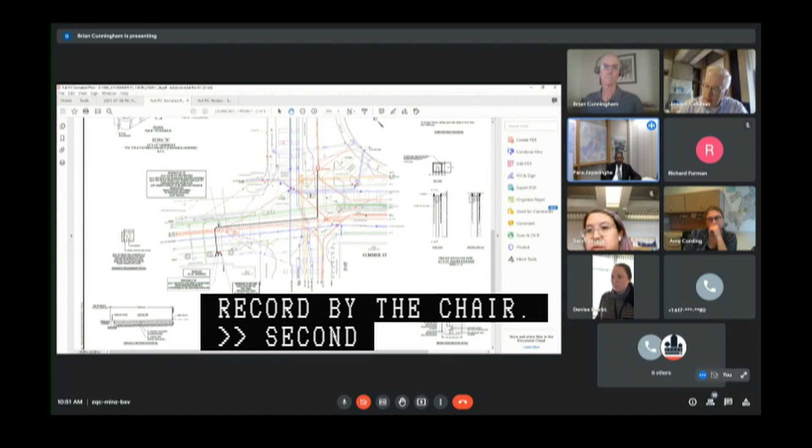Hearing no further comments by staff members and or commission members, I'd like to hear a motion regarding public hearing number 6. I make a motion to approve a petition by Crown Castle for a grant of location in the area of Summer Street and D Street, as more particularly read into the record by the chair. Second. All in favor, please signify by saying aye. Aye. Aye. Anyone opposed or abstain? Motion passes. Thank you, Brian. That concludes the public hearing segment of today's agenda.

Now moving on to the new business segment of today's agenda. New business item number 1, 233 Hancock Street, Dorchester, grant of location on a petition by Verizon New England, Inc. Good morning again, Public Improvement Commission. Again, Richard Furman representing Verizon New England. This petition is to connect one new 4-inch Schedule 40 PVC conduit and one 4-inch conduit with 1.25-inch interduct for a city shadow duct from existing Verizon manhole 609A in front of 289 Hancock Street and extending 230 feet to a break-off point in front of 244 Hancock Street, where 17 feet of conduit will be placed from the main conduit run to the property line of 244 Hancock Street.

This is a 17-foot section of conduit. It's also going to have one 4-inch conduit for Verizon's use and one city shadow duct with 4 1/4 ducts. From this point, it's going to extend an additional 145 feet to another point in front of 244 Hancock Street. This will extend an additional 17 feet to the property line. We'll have a 4-inch Schedule 40 duct for Verizon and 4 1/4 ducts for the city. From there, it's going to extend 198 feet to in front of 233 Hancock Street to the property line. All of these sections will also include city shadow ducts as noted, 4 1/4 ducts. Again, this is just for new service at 244 Hancock and 233 Hancock Street.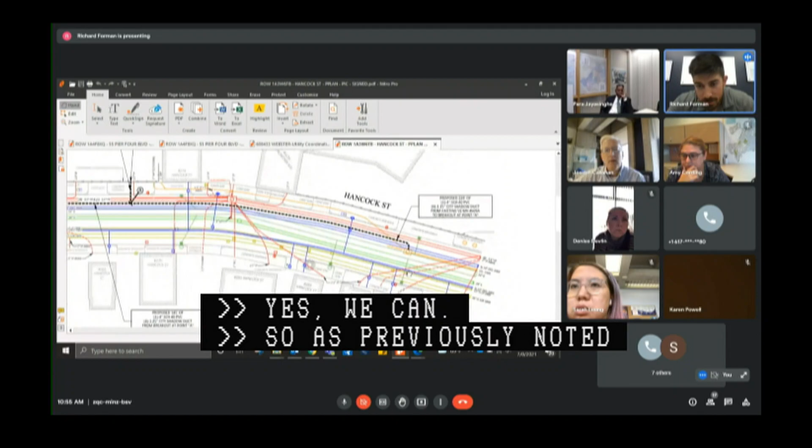Yes, we can. Okay, so yes, as previously noted, here's existing Verizon manhole 609A in front of 289 Hancock Street. As previously noted, this is 228 feet of conduit to point A, which is in front of 244 Hancock Street. From this point, it's going to be a breakout, which is going to have one 4-inch conduit for Verizon and 4-1/4 city shadow ducts, as well as this main run from the manhole.

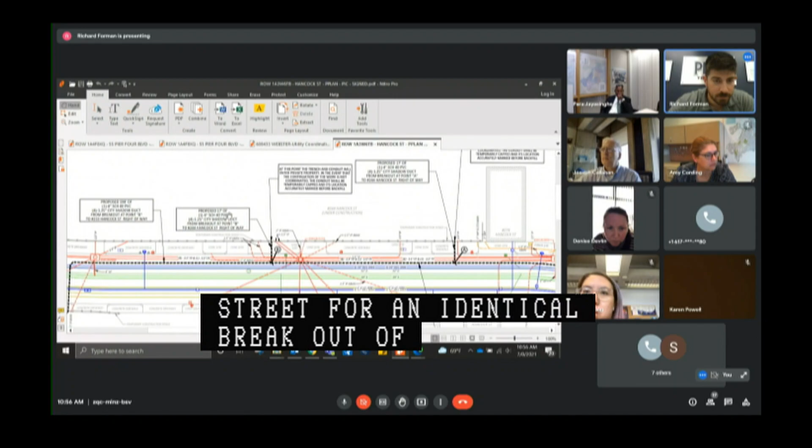From this point A, it's going to extend 145 feet to point B in front of 244 Hancock Street, where an identical breakout to point A will have also 17 feet of 4-inch duct for Verizon, as well as 4-1/4 for the city use. And then 198 feet from this point over to 233 Hancock Street, the property line. And this section is also going to have 4-inch conduit for Verizon and 4-1/4 city ducts.

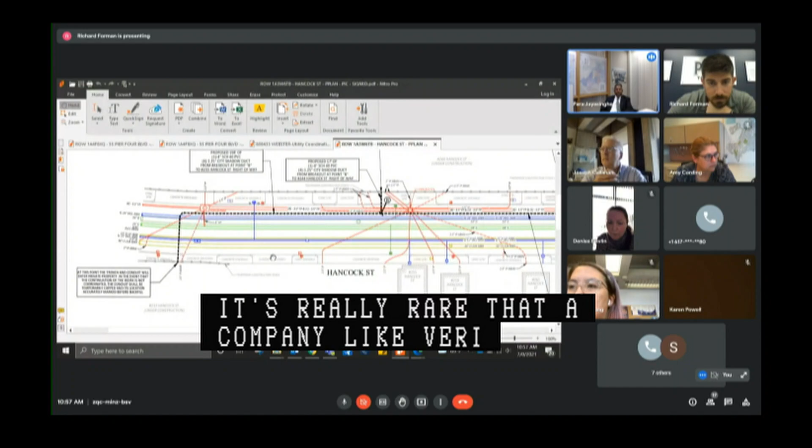Richard, points of clarification, it is very rare that our old telephone company or Verizon didn't have any conduits anywhere within the city. So a little bit confused as to why you all need these conduits on a very common street as Hancock Street. I don't recall whether this is an underground district or whether there are overhead utility poles. So could you shed some light as to why such conduits are needed, especially for a company of Verizon's heritage within Boston?

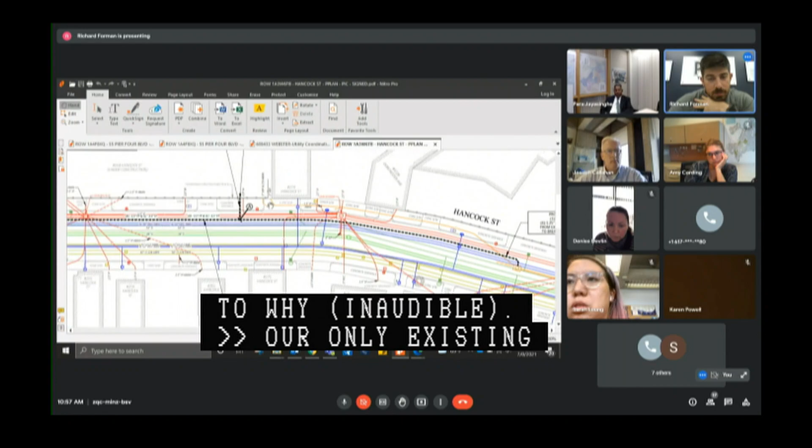Just from what I can tell with this plan, our only existing conduit that we have extends from this manhole to the corner of 274 Hancock Street. So I would assume that because we don't have any existing ducts continuing on this street, this is the only effective way to feed this new construction for these sites. All right. Always stand to be surprised. Thank you, Richard. I appreciate you sharing that information. Any comments or questions, concerns by fellow commission members?

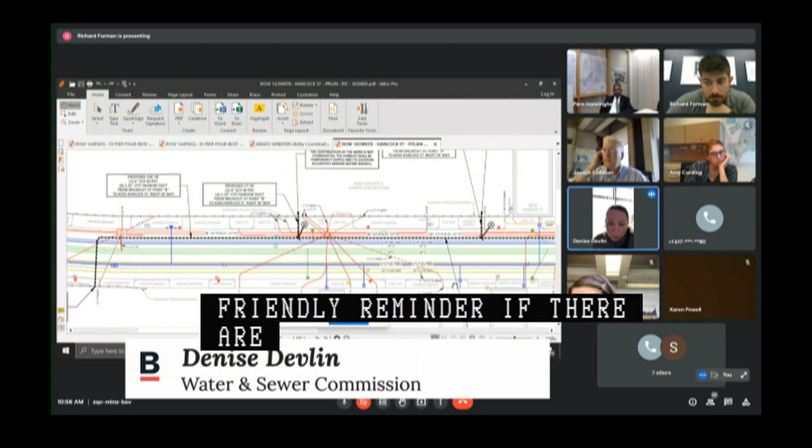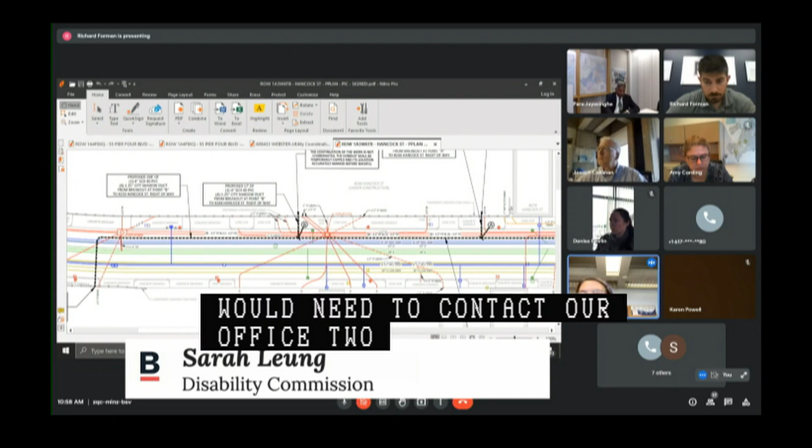Oh, good morning, Richard. Just a friendly reminder, if there are any comments or any changes to what we approved, we just have to send them through our engineering and customer services and get it approved before public hearing. Understood. Thank you. The Disabilities Commission would like to double check with the team just to ensure that there aren't any accessible parking spaces located along this stretch. If any of those spaces were to be affected by construction activities, you would need to contact our office 2 weeks prior to construction to coordinate a relocation of those spaces. So we just want to flag that at this stage.

So you just wanted to make sure that no parking spaces were going to be disturbed? Is that what you said? I'm sorry. Yes. So if there are any on-street accessible parking spaces, the signs with the blue wheelchair, we would just need to know if those spaces are being disturbed, where their locations are, and what the relocation plan is for that. And all of that needs to be coordinated and approved through our office before proceeding to construction. Absolutely understood. Thank you, Sarah. Any other comments, questions, concerns by commission members? Hearing none. Any comments by PIC staff and or members of today's audience?

Just wondering if anybody from Verizon is present on this call? Yeah, this is John Riley, Verizon engineer. I've called and I'm not on the video meet. Thank you, John. Thank you, Mr. Riley. At the public hearing, if you could identify yourself, if and when Mr. Forman announces himself, that would be much appreciated. Okay, thank you. Todd, any other comments? Further comments? No, not at this time. Great. Then we will mark you up for 2 weeks, which should put you to see us on July 22nd. Yes, July 22nd?

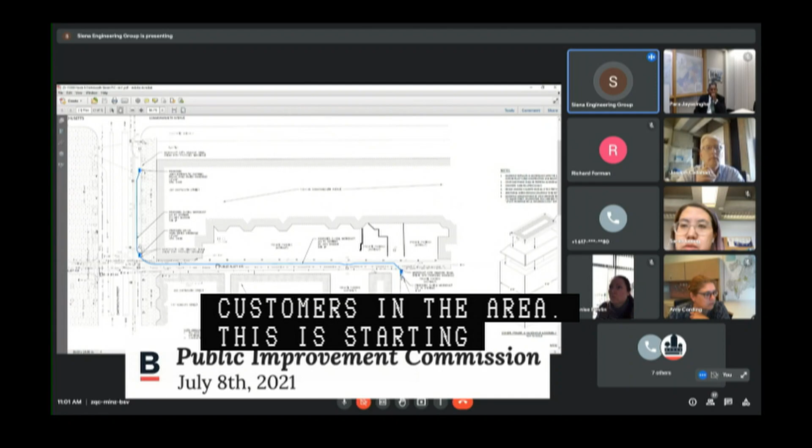So this is a proposal from TC Systems to install about 400 total linear feet of microduct fiber optic to serve customers in the area. This is starting at an existing TC Systems manhole on Public Alley 435, continuing down Public Alley 435 around up Dartmouth Street and ending at an existing lamppost just before the intersection of Commonwealth Avenue.

We did have a couple of revision requests that have been revised on this plan that you're seeing now compared to the original. So originally we had a manhole in the sidewalk. The Disabilities Commission had asked that we move that into the street. So we reduced the size, and I'm going to zoom in here, we reduced the size of it to minimize the impact and moved it outside of that ramp.

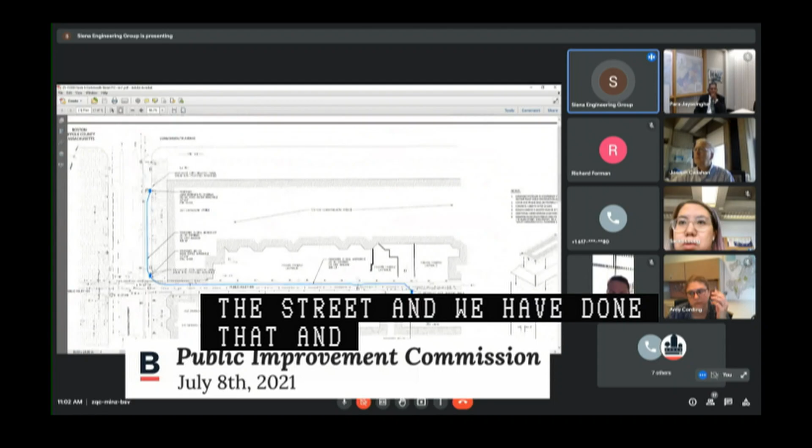And then the Parks and Recreation Department had some concerns about the original placement of this handhole, which was next to this lamppost in the sidewalk again. It would have impacted the existing tree and root system there. So we again moved that, downsized the structure, made it a road rated structure and moved it into the street to still satisfy the design requirements while not impacting those roots. I believe those are the extent of the requests.

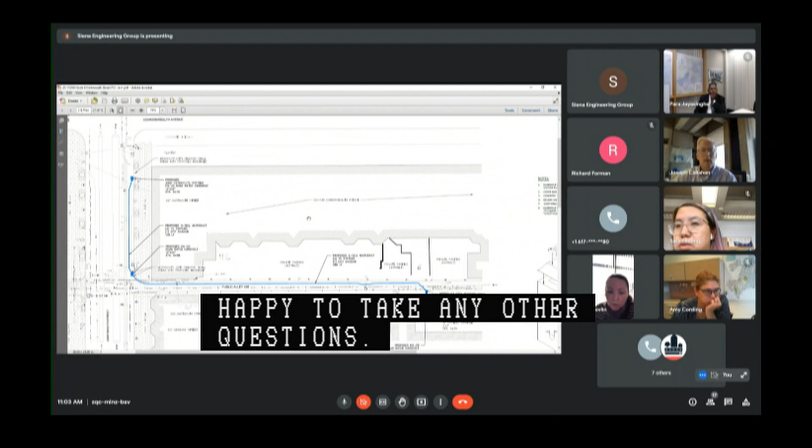And so if there aren't any other requests, we'll be able to send this final plan back to Water and Sewer for final approval. Thank you. Sure, I'd be happy to take any other questions. Denise? Oh, yes, Para. Sorry, I thought you had a question or a comment. Oh, no, I'm sorry, Para, I just said thank you to Adam, he made a comment that he's gonna come back to us so we get the final approval, because they were different from what we approved before. Thank you, Denise. Sorry, I missed it. No worries. Any other comments for Adam?

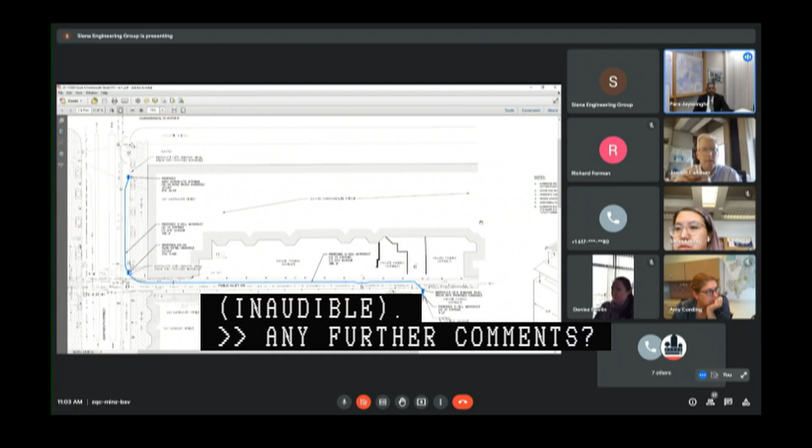Adam, for me, could you do me a small favor when you come back for the public hearing? It's nice for you to, just for this situation, have a photograph of how public alley 435 looks. I don't quite recall, and I'm a little bit concerned. Now, you are doing a micro trench, right? That's correct. At what depth, again, for the purpose of my recollection? It'll be no more than 6 inches deep. Got it, okay. And how long will it take you to perform this work on public alley 435? Public alley 435 should be finished up in 2 to 3 days. It's a very quick process.

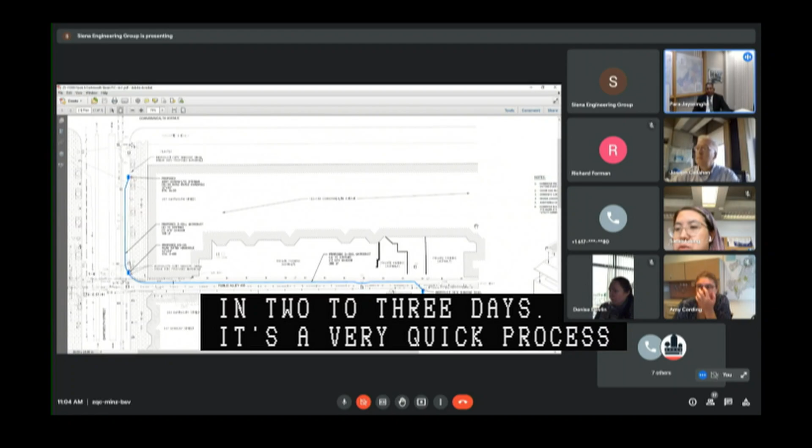Okay, because sometimes, I think Ms. Cording from the Transportation Department should be able to give me better guidance. Some of these back alleys, public alleys are notorious for access into the properties, and they may be concerned with the hours of construction. So hopefully you will be sensitive to the abutters and the neighbors while you are making construction. Every once in a while, some of these public alleys have drainage issues that can be amplified or become an issue for us. So hopefully you will be good corporate citizens and do what is needed.

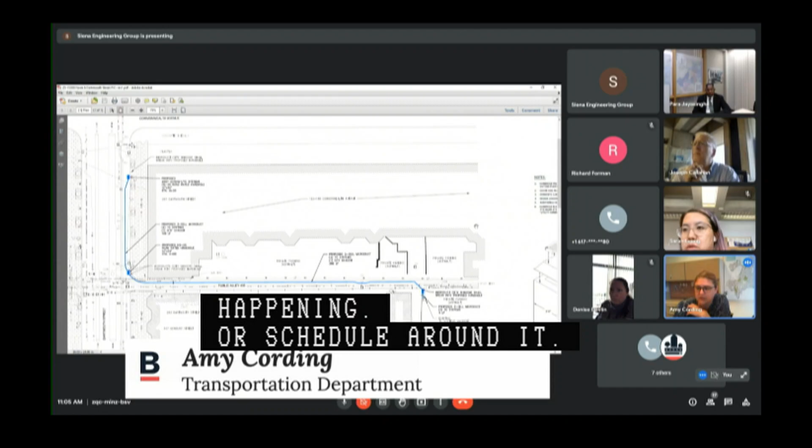They'll be all right on the public alley. You gotta stay away from trash day. It's a whole line of dumpsters out there. So I wouldn't construct when that happens, or schedule around it. Cause your whole run is just a row of dumpsters. So you're gonna have to schedule around them. Okay, understood.

Awesome. Any other comments by commission staff? Comments, guidance by PIC staff and all members of today's audience? No, none. Hearing none, we will mark you up for July 22nd, which is 2 weeks from today. Okay, then. See you, thank you very much. And then just to clarify, if I might, at the public hearing, I can bring a photograph of what public alley 435 looks like currently, and I will be sure to coordinate around trash day when construction time comes. Thank you, Adam. Truly appreciate that sensitivity. All right. You got it.

Thank you very much. I believe that concludes the business of today. I'd like to get a motion to adjourn. I'll make a motion to adjourn. Second. All in favor? Aye. Aye. Motion passes.